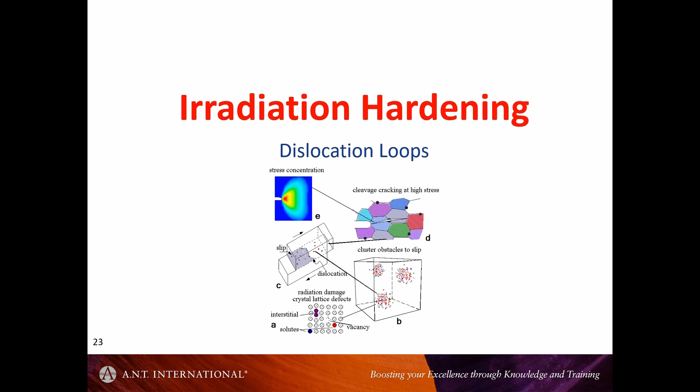Okay, so we're at the point here where we're moving on now to other forms of radiation hardening. I mentioned that just briefly,

and I see that this does not work. I see, oh, there. It doesn't work with the pointer.

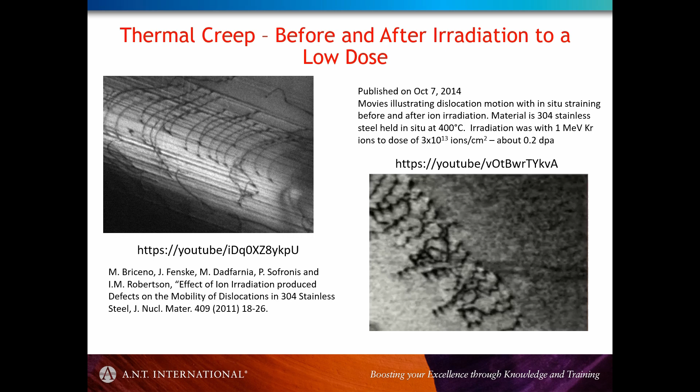This is off the internet, and this is some work by Briceno and Ian Robertson's group, showing the effect of how dislocations glide in an unirradiated case. But then if you irradiate it, I can't go back there. If you irradiate it, basically it's more difficult for the dislocations to glide.

In that example, I've just flipped through. I apologize, but I can't go back when I'm recording. In that example, and you can see it on the internet, very, very little radiation damage, but what little damage there was, albeit submicroscopic, was still sufficient to drastically slow down the dislocations, the dislocation slip.

So having radiation damage is basically one way to harden the material, make it more difficult to get dislocation slip.

But irradiating doesn't necessarily give you that damage increase in the defect density, because if the temperature is low enough in nickel alloys and austenitic steels, you can get to a condition where recombination is enhanced, and basically there is insufficient supersaturation to get cluster formation, and the material basically remains soft at the lower temperature.

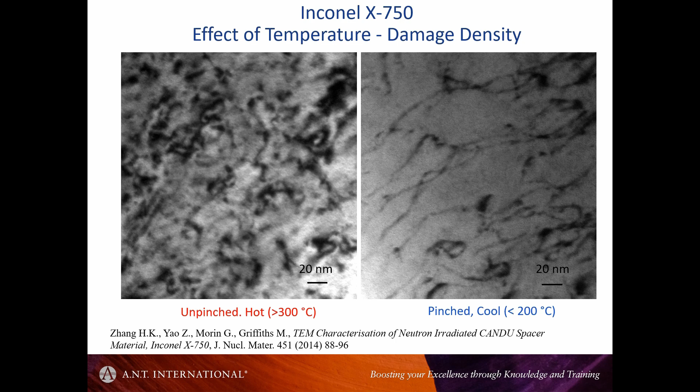Again, a little bit counterintuitive, but that is not the reason for the change that we see in irradiation. But it just illustrates that the general softening of material at lower temperatures occurs for two reasons. One, because it's easier to dissolve and disperse the precipitates, but also you don't get the hardening effect if it's at low enough temperature.

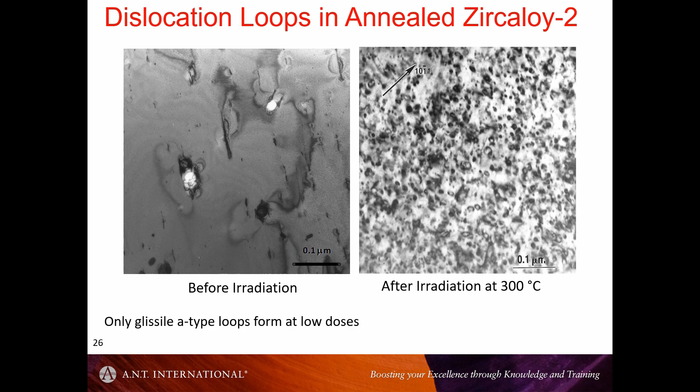So going back to Zircaloy now, I apologize for flipping back between different alloys, but many of the mechanisms are very common to both, so it doesn't really matter. So when it comes to radiation hardening, this is the typical way that material is hardened. You create dislocation loops and then barriers for slip.

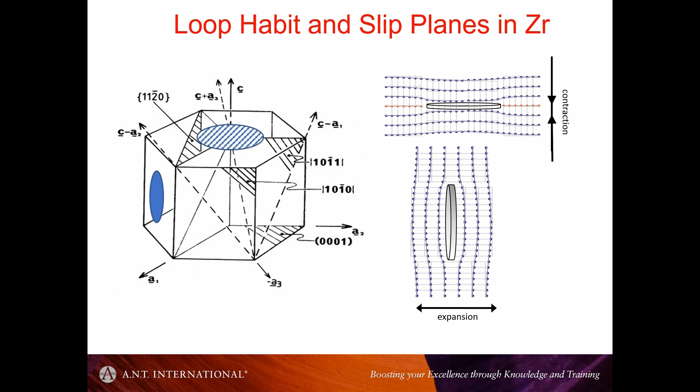In the case of zirconium, quite apart from the deformation producing two types of dislocations, radiation also produces two types of dislocations, and typically that's dislocation loops, prismatic dislocations on a basal plane compared to the prism planes.

Oh, and I'm just throwing this in to illustrate a little video I took when I was a student doing my PhD of a C-component loop in zirconium in the high voltage electron microscope. So we're using the electrons to image the material and at the same time damaging the material, creating point defects at an elevated temperature, 300 degrees C in this particular case.

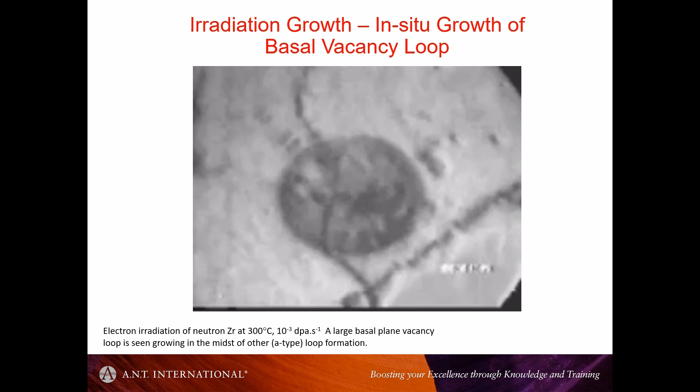And you can see how the loop is growing and how other defects are produced. The interesting thing about C-component loops in zirconium alloys is not only are they barriers to slip, but they have an effect on the dislocations directly, because the C+A dislocations I mentioned earlier,

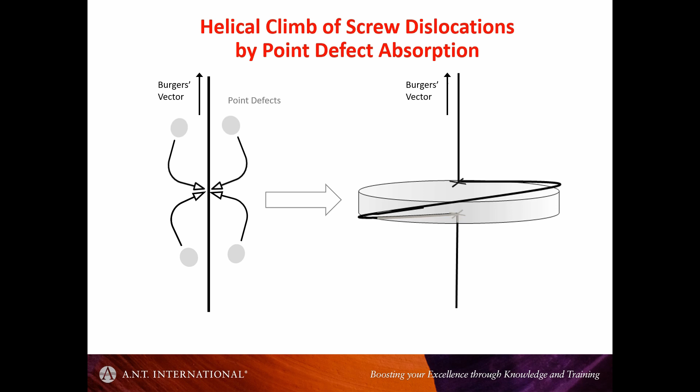they will attract vacancies. Oh, sorry. What you tend to get is vacancies tend to agglomerate on these dislocations and climb helically. And what that looks like, if you look at a before and an after, if you have a screw C+A dislocation and then you irradiate it, you get this helical climb. And we're seeing the helices edge on here, this helical climb.

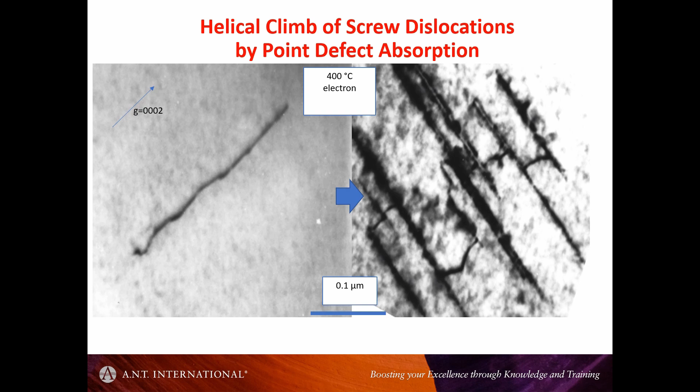And basically what that does is that it locks up this dislocation. I mean, that's a very severe hardening effect, because that dislocation is not going to go anywhere.

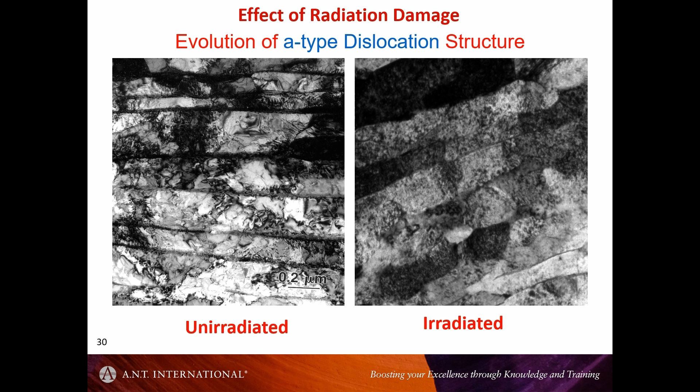Here's another example of the complexity of dislocation structures in materials, but also when you irradiate. So in the Zr-Nb pressure tubes, which I'm most familiar with, you have this small grain, high dislocation density structure, and then when you irradiate it, it just becomes even worse, because you're introducing all of these dislocation loops.

And then when you look at the C-component structure, which can be very complex, even more complex when you irradiate it, it all goes to the same end. You basically harden the material; it makes it much more difficult to deform.

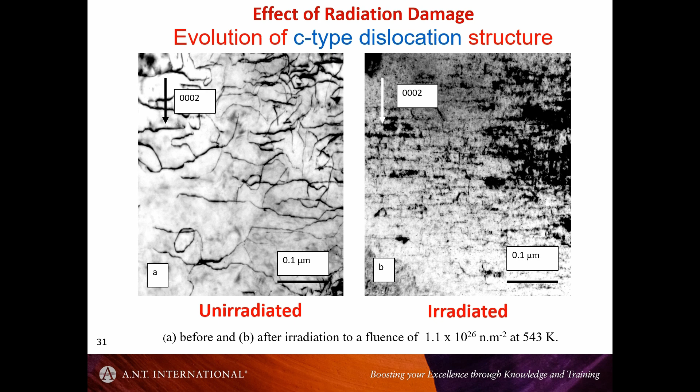So this is back to front, but what I wanted to show is that the loop damage, this is the A-type loop damage now, in a Zr-2.5Nb pressure tube. The density of the damage varies according to the temperature and the flux profile. So we tend to have a distribution of damage along the length of a 6-meter long tube, going from the inlet here, I'll get the pointer again, going from the inlet here to the outlet here.

And at the cooler end, you tend to get higher density of radiation damage and a lower density at the hotter end. These values here for the damage density are taken at different clock positions, starting from 6 o'clock, which is at the bottom here, and 12 o'clock at the top. And what that basically means is, as you go from one end of the tube to the other, the spread in the conditions around the tube increases, and the tube gets cooler at the top and hotter at the bottom, and that's reflected in the damage density.

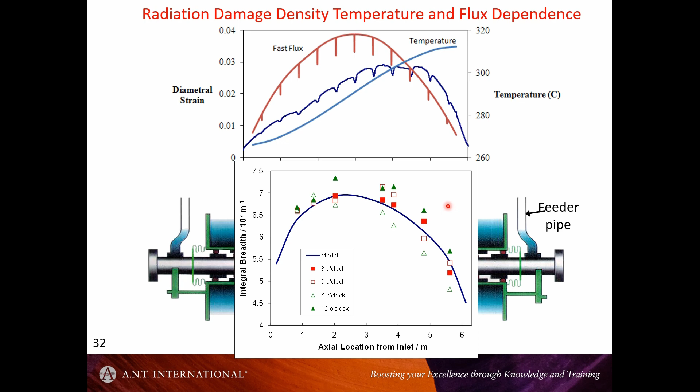And that's a phenomenon known as flow bypass, and that's the subject of another talk if it ever came to that. So this just illustrates the general effect of temperature in the Zr-Nb pressure tubes on the damage density. And this is illustrated also in steels. Here's something I took from a review by Pawel with Steve Zinkle.

And basically, you see, as a function of temperature, using yield strength as a surrogate for the loop density, what you see is that at high temperatures, basically the loop density becomes much lower, and the yield strength of the irradiated material approaches that of the unirradiated material, and that's because you have insufficient supersaturation at the higher temperatures to cause loop formation.

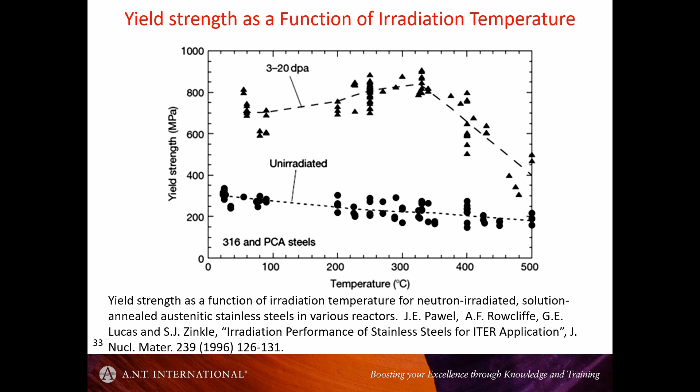There's a sweet spot here around about 300 degrees C, and at lower temperatures, because you get a bit more recombination going on, you can reduce this density as well. And again, that's counterintuitive, but not if you work with radiation effects and what the supersaturation of the point defects means when you do rate theory calculations.

And the last slide for this session is here, and it's just a copy of a figure from work by Seok Byun, who did some excellent work on strain localization, mechanical properties of irradiated steels, and he's mapped out what types of deformation one gets as a function of the stress and as a function of the dose in 316 stainless steel. This is a low temperature irradiation.

So I mentioned that in the Inconel X750, at this temperature, actually we didn't get any damage, but it seems that in 316 stainless steel you do. So I'm not sure why we get that difference, but it's still diminished relative to the 300 degrees C. So even though we have a lower damage density at these temperatures, you can map out what type of deformation mechanisms apply at different regimes as a function of dose and as a function of the stress.

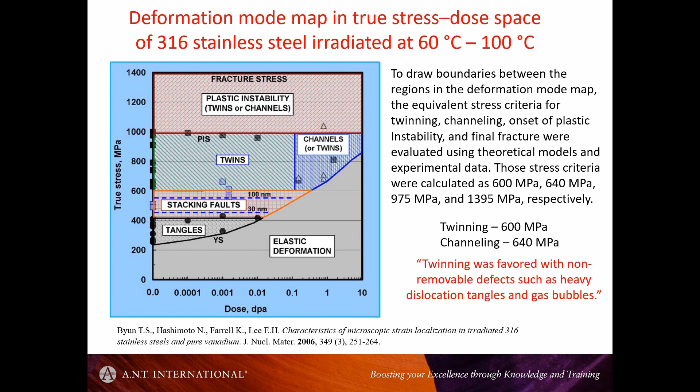So just pay attention to note that Byun's results showed that in irradiated 316 stainless steel, typically they would observe twinning at 600 MPa and channeling at 640 MPa if they were to demarcate the two. Although by and large, they often got both mechanisms occurring. Okay, so I'm going to stop.